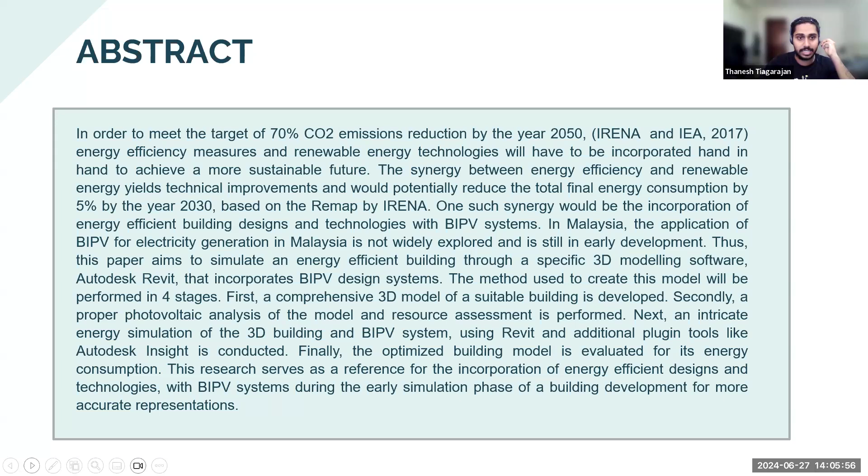Okay, next slide. Before I begin, let me give you a rough overview of the energy scene in the world, and particularly in Southeast Asia.

Based on the world energy transition outlook, almost two-thirds of carbon emissions released in the world are related to energy related emissions, with about at least 36 gigatons of CO2 released by five of the major countries in the world, and this is almost 70% of it.

So, to reduce the CO2 emissions by another further 70% by 2050, certain energy efficient parameters and renewable energy systems would have to be incorporated together to actually achieve a little bit more of a sustainable future. So the synergy between these two systems could potentially decrease the total final energy consumption of the world by 25 exajoules, which is about 5% by the year 2030.

So one of these methods would be the incorporation of energy efficient building designs and technologies with BIPV systems. Now, energy efficient building design is a process of upgrading or constructing building elements that are able to maximize the consumption of energy supplied to them by reducing energy losses. Now, BIPV systems, however, are products and components that are integrated into the building structure.

So, based on the 11th Malaysia Plan, since this research was conducted mainly in Malaysia, the country actually aims to have at least 2080 megawatts of energy inside the renewable energy mix by 2020. Sorry, excuse me. All right. However, the application of BIPV specifically in Malaysia is still very scarce and in its infant stage. So, in a final report submitted to the United Nations Development Program, Malaysia aimed to achieve at least a 330% increase in installed BIPV capacity.

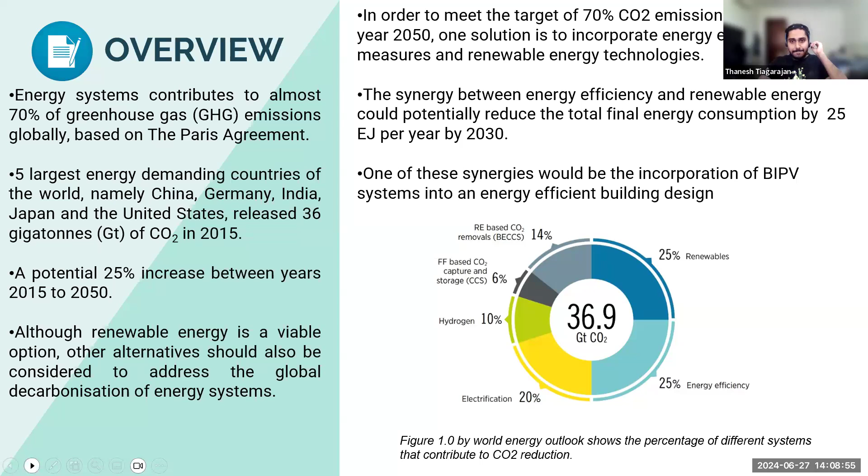So based on the overview and the information stated above, there have been some research gaps that have been identified to help facilitate this transition towards energy efficiency and building integrated photovoltaic development. So when you come towards energy efficiency, there is an abundance of research on design and technology that has been going on for over the last decade. Similarly, there has also been research on BIPV systems and photovoltaics, and it has been steadily gaining traction over the last few years as well.

However, there has been very little, and that has been actually one of our driving motivators here to further this research. There has been very little research on how these two parameters or how these two researches coexist or interoperate with one another to obtain more significant results in terms of how building information modeling should be done. So that was actually, like I mentioned, our main driving initiative.

So the idea was to simulate an energy efficient building design by reducing carbon footprint and enhancing the bridge between energy efficiency and BIPV systems through a unique method of 3D building information modeling. Next slide.

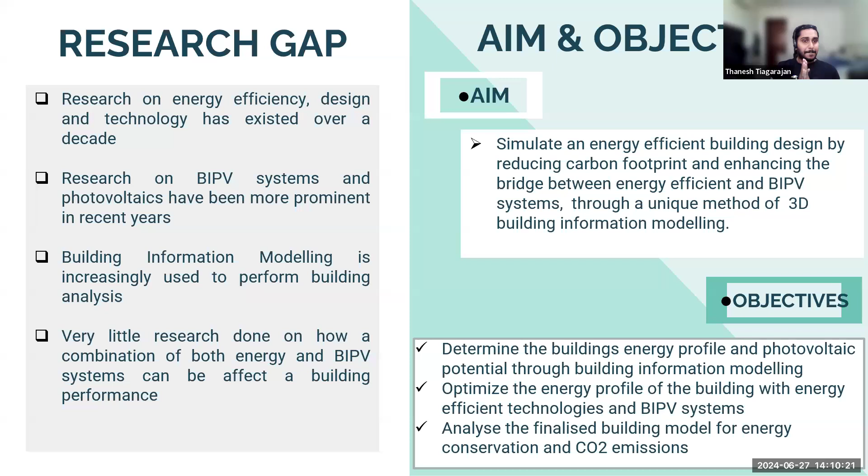Right. So this research mainly integrated the use of Autodesk Revit, Insight, and Green Building Studio. So Autodesk Revit is basically a multidisciplinary building information modeling tool universally used by architects, designers, and engineers to create a holistic 3D building model with real-time information. So it is a design and documentation tool that allows users to create a singular unified building information model complete with conceptualizations and designs. So its compatibility and integration with various other simulation softwares in the market make this an ideal choice for the project.

So when you look into Autodesk Green Building Studio, however, it is a flexible cloud-based tool that exists within Revit, and it is the main simulation engine that powers the analysis function for the photovoltaic analysis. When you look at Autodesk Insight, however, it is also a cloud-based tool that is used to design or enhance the energy design of efficient buildings through advanced simulation engines and analysis of building performance data.

So this particular Insight serves as our main computational tool, as the software generates information regarding the building's projected and current energy use and its subsequent cost to provide you a cost analysis. And it does this through features that focus on energy optimization and performance of the building. Next slide.

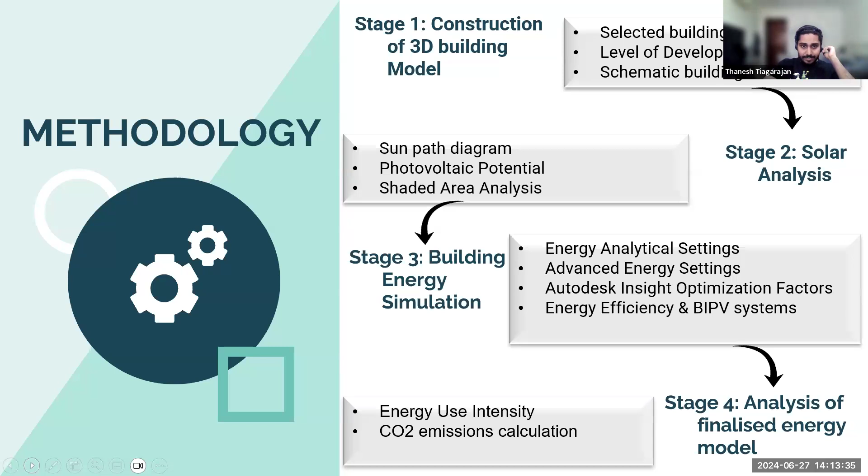Okay. So in stage 1, basically the idea was to develop the model for us to use inside our modeling tool. So in this case, as part of the case study, the building that was chosen for simulation is a building known as Aemulus at the Runway, located at Bayan Lepas in Penang. The main reason for the selection of this building was because its architecture naturally promotes natural lighting and air convection for temperature reduction within the building, such as perforated walls, angled windows, walls, and skylights. So in order to construct this model, floor plans were imported into the 3D modeling software and then constructed manually to scale.

So the next important aspect of consideration is the level of development. Before beginning any building information modeling development, it is important for us to define the intended LOD of the project, short for level of development, based on the available information needed to run the simulations. The term LOD is basically defined as how much detail is included in the elements of the model and the extent of accuracy of the building development with regards to its geometry and attached information.

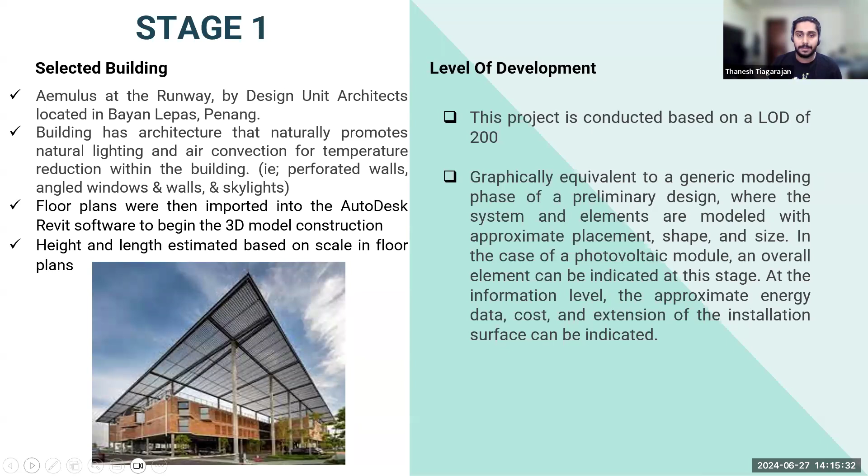All right, so in stage 2 under Autodesk Revit, the sun path is visualized based on geographical building coordinates defined inside the software itself. These sun path diagrams are essential in providing information on the location of the sun and its subsequent impact on the building throughout the year. Besides that, shading analysis is also important to determine the impact of shade by objects surrounding the building or by the existing building elements, such as the facades or the perforated walls, like I mentioned earlier.

So what this highlights is that the facades affected by shade are essential in determining the most optimal location for PV panel placement and its subsequent impact on the total energy value of the building itself. Data on this photovoltaic potential was retrieved from Autodesk Green Building Studio. Yeah. Next slide.

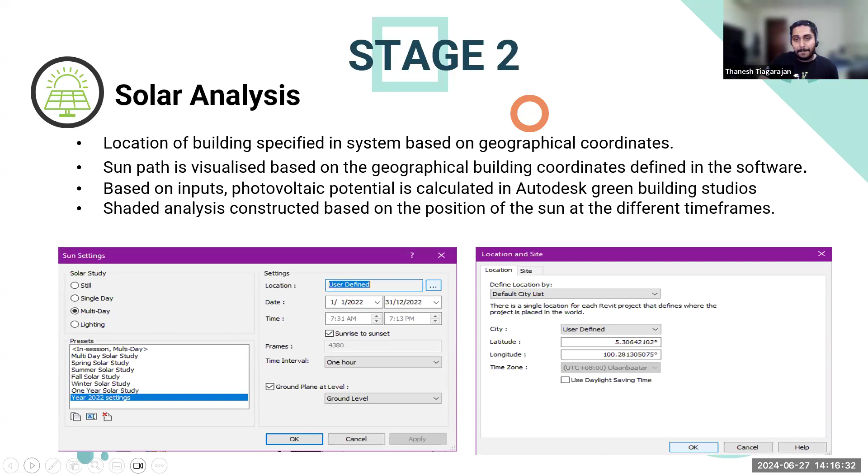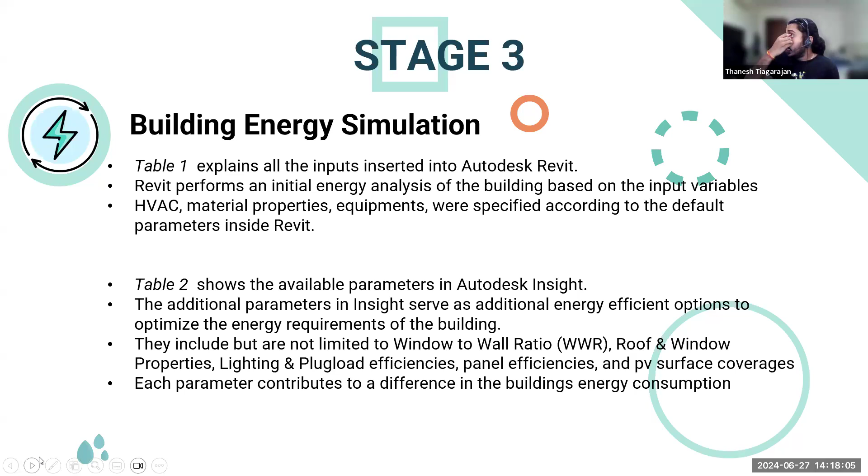Table 2, however, shows the available options inside Autodesk Insight that allow you to use energy efficient options to optimize the requirements of the building. They include but are not limited to the window to wall ratio, roof and window properties, lighting and plug load efficiencies. For the BIPV aspect, we have panel efficiencies, PV surface coverages and payback periods. So if you were to look at the next slide.

So basically this is a slide that describes table 1, showing the input variables that were included to create the constant model for us to perform our optimization values for. Okay, next slide.

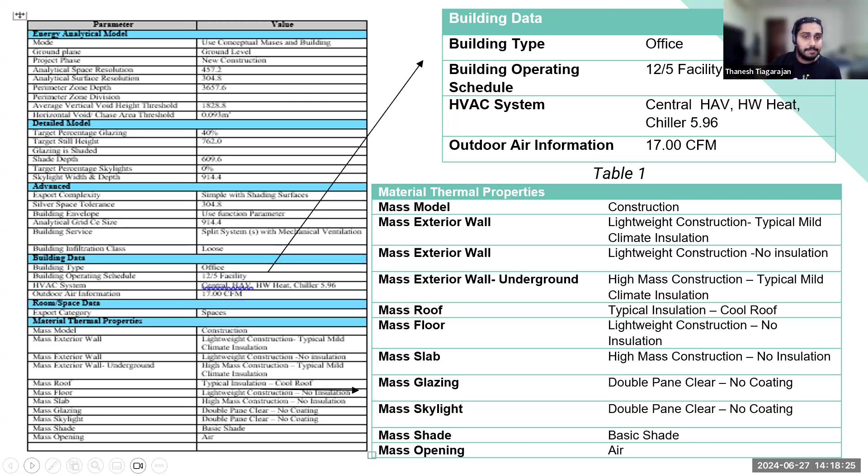This is table 2. These are the options available to utilize the energy efficient parameters inside Autodesk Insight to create different scenarios and cases at which we can identify the best geometry, the best design, or the best parameters for an energy efficient building.

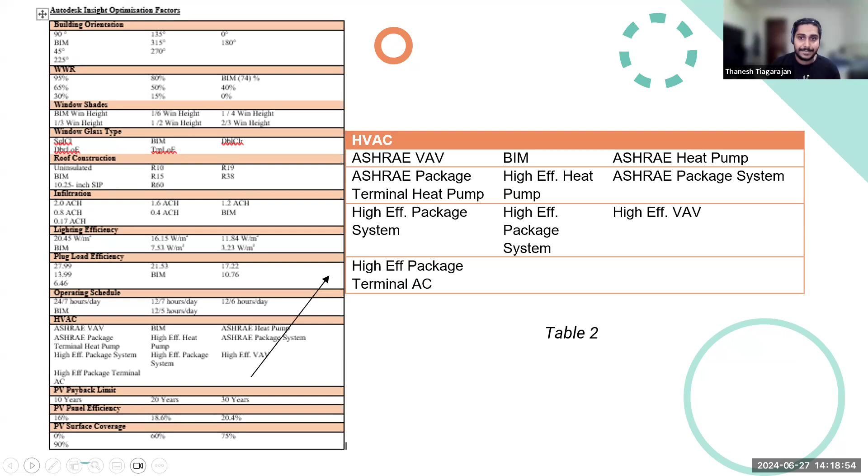Next slide. Each of these parameters contributes to a difference in the building's energy consumption, and this energy consumption is quantified through a specific metric known as energy use intensity. The indicator of the energy efficiency of a building's design and operation is defined as the EUI. Each parameter, as described in stage 3, affects the building's energy consumption and contributes to a change in the EUI based on the amount of energy either consumed or saved.

For example, a hospital or a laboratory will have a higher EUI value than a residence or a small office building because the demand is naturally higher. This is calculated by dividing the total energy consumed by the building in 1 year over the gross floor area of the building. If a system combination consumes more energy after the optimization, the potential difference of the EUI value is displayed as a net positive, meaning that after optimization you require more energy to operate the building on a daily basis.

So if your combination of energy optimization parameters manages to save energy, then that potential EUI difference is described as a net negative value. Autodesk Insight then compiles all these individual positive and negative values to come up with a finalized intended combination and a singular EUI value.

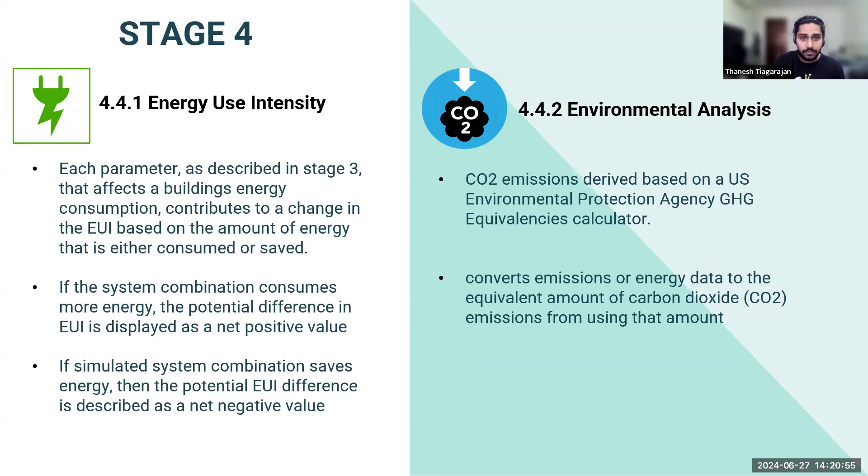On top of that, we also use the US Environmental Protection Agency's GHG equivalencies calculator to identify how much carbon dioxide emission is excreted from each model before and after the optimization has occurred. Next slide.

Okay, so as the result of discussions, in terms of defining the model, the dome highlights the solar positions based on real-time data to simulate the past and future sun locations for solar and daylight analysis. Since Malaysia is located near the equator, the model justifies that there will be substantial and constant sunlight throughout the year.

Based on this, it is proven that the northeast and southeast facades receive the most light in the morning, and the northwest and southwest receive the most light in the evening from about 5 to 7 p.m. Revit also computed the global horizontal irradiation and direct normal irradiation data. Next slide, please.

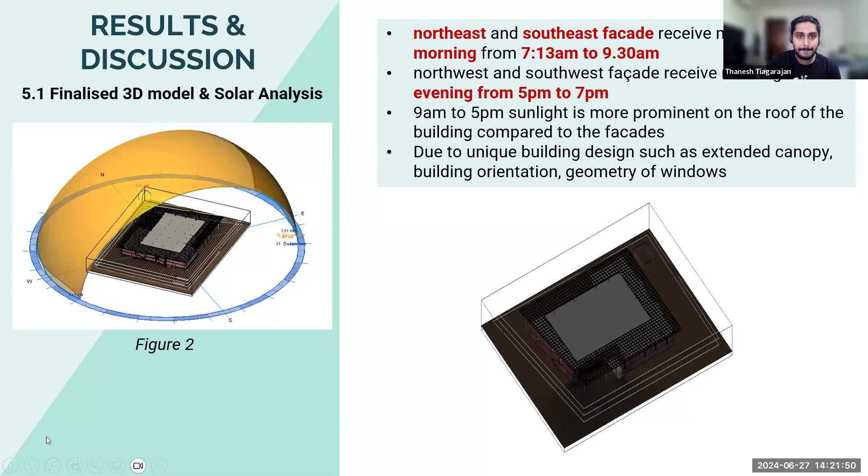Based on this data, the model receives the highest peak irradiation in the month of June 2022 with a total irradiation of 162,000 watt hours per meter square. The peak direct radiation is also at a total of 185,000 watt hours per meter square, which is also in the month of June.

What this data clearly supports is that the sun path diagram is accurate, identifying that June and July receive the highest amount of sunlight in a year. The rotation in the sun's trajectory clearly indicates that from May to August the sunlight received is highest above other months consecutively.

Due to the building's unique design, such as the extended canopy, building orientation, and geometry of windows, sunlight is more prominent on the roof compared to facades. The canopy is constructed in a manner that extends outwards as an overhanging roof from the perimeter of the roof to shield the facades from excessive sunlight. The protruding geometry of the window itself greatly limits the impact of solar radiation on the facades and shields the glazings. Next slide.

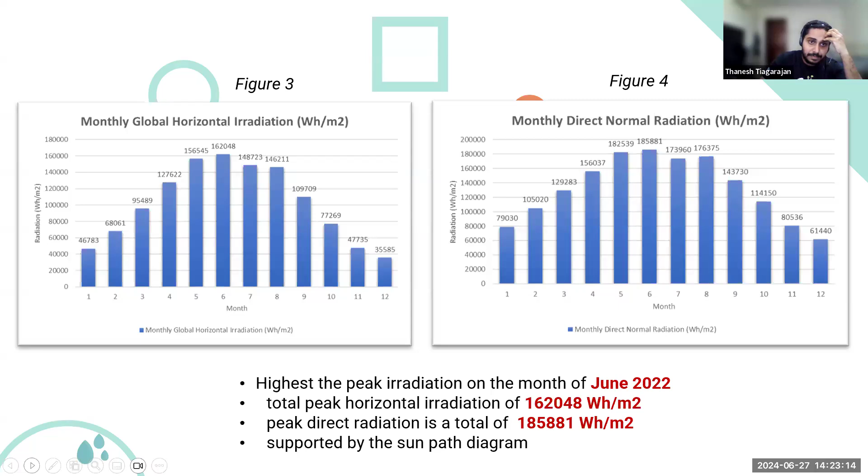Okay, so this is basically the initial energy simulation based on the constant that was created and defined as the parameters from table 1. So based on the input parameters defined in the system settings, Revit was able to compute a wide variety of performance indicators to accurately depict the energy demands and their subsequent contributions towards the energy mix of the subsequent building. So due to the broad purview of the results, the section below highlights the information that is only relative to the scope and extent of this project.

So in this case, it would be interior lighting, interior equipment, and the total energy consumption. So based on the graph, the highest months that require the energy are basically in the months of January, July, October, and December. These values are simulated based on operational hours defined in the system input and based on equipments in the building as estimated by Autodesk Revit. So the increased monthly electrical consumption during these months indicate that the load requirements are basically higher. In July and October, heat and light received are the highest, therefore more energy is required to regulate the cooling system of the building.

Now, when you look at the percentage of energy consumption, it can be seen that electricity is required most for equipment at 57%, and interior equipment at 57%, followed by lighting. So as explained in section 2, this exists because of a default set value and synonymous to the level of detail based on 200. So as you progress to higher level of detail such as 300, 400, and 500, for example, you can use more detailed data to create different variations and different sections to determine how much your building's energy contributes to your entire energy consumption.

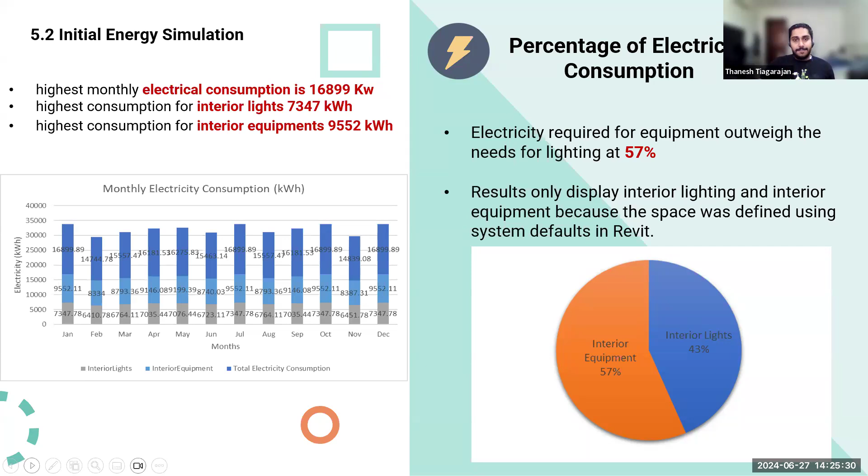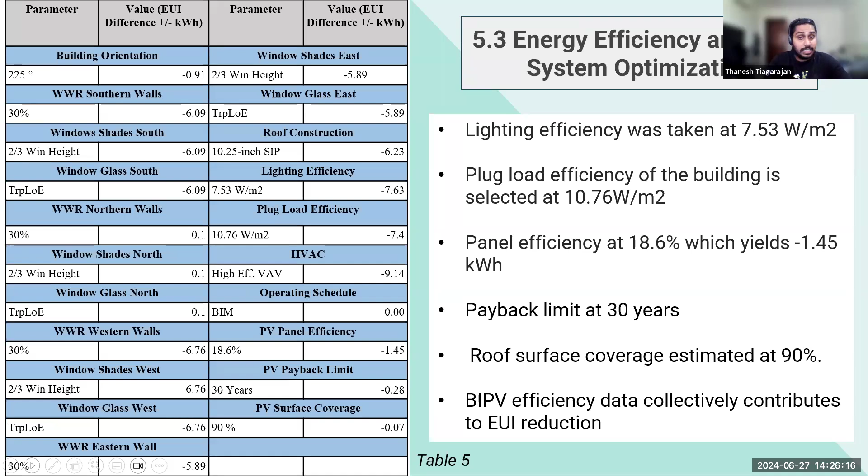Okay, so these combinations that were selected here are based on the constant option like I defined in the model. This means that if you were to look at this graph, the BIM option is essentially information modeled as and how it is from Autodesk Revit. This is based on the building's parameters, the building's geometry, angle of inclination, however the building is actually made currently. So most of these parameters do not affect the pre-optimization EUI values of the building. This is due to the fact that they are basically input variables. Now, the initial energy simulation performed by Revit already utilized these values to simulate the analysis to generate a constant that can be used as a reference. Next slide.

Now, the combinations given here are selected by Insight as the most viable system configuration that is highly interactable with the existing system of the building model. If you were to look at the graph here, the optimization with respect to BIPV, for example, highlights an average surface area about at least 18.6%. Sorry, that is in terms of PV panel efficiency. So when you look at these graphs, this does not identify a trend, or how I would say a progressive state. What this shows is how different optimization factors affect your energy use intensity value for that specific building.

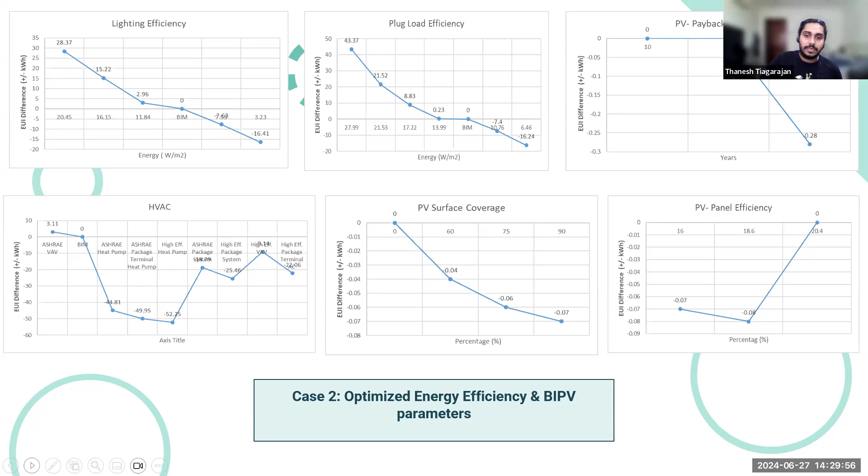Next slide. So based on what was described there, each of these differential EUI values contribute to a much larger EUI metric. So the final EUI value was extracted from the Autodesk Insight interface and shows that the optimization for the initial system with additional energy efficient parameters has managed to reduce the building's final energy consumption from 194 kilowatt hours per meter square per year to 140 kilowatt hours per meter square per year. So this was a reduction of 27.8%.

So to benchmark that result, that the building is actually an energy efficient structure, the final EUI value was compared to two international standard metrics, namely ASHRAE and Architecture 2030. So Architecture 2030 is an independent organization with goals to minimize greenhouse gas emission, reduce energy consumptions, and also improve adaptive building environments. ASHRAE, however, has a benchmark for energy efficient building designs, and it considers the minimum energy efficiency requirements for the construction and designs for a new building, at the same time determining compliance criteria for green building considerations.

Now, based on this roadmap, it is determined that 61 kilowatt hours per meter square per year is determined by Architecture 2030 to be considered as an energy efficient building, while the ASHRAE 90.1 consideration determines 196 kilowatt hours per meter square per year as an energy efficient metric. So the result obtained by this energy analysis shows that this simulation stands somewhere in between these two performance rating systems. It is important to note the purpose of the building and explanation given in the previous sections, highlighting the fact that it was a very early design stage-based simulation.

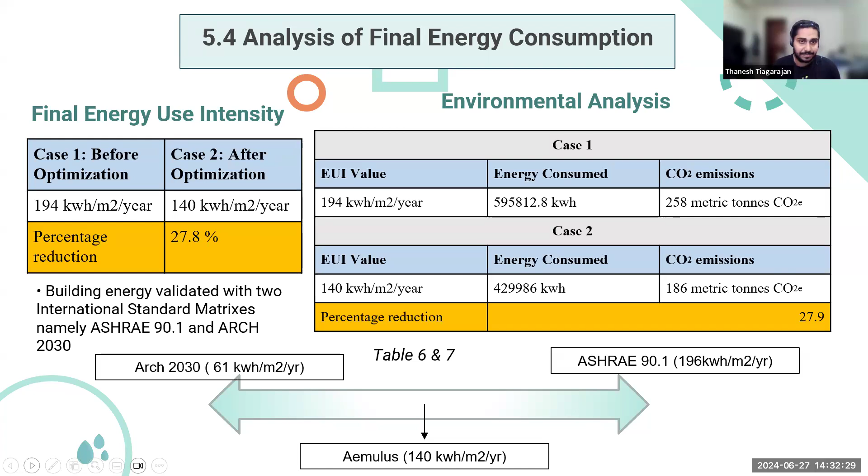So to conclude, building information modeling and tools are actually very useful in performing detailed building analysis. So the geometry and design of the Aemulus structure greatly reduce the building's energy requirement, incorporating merely just default values set by Revit. So when you look into the future and how you could expand this for future users, you could probably see that defining more detailed parameters into your BIPV tools, your building metrics, like I mentioned, lighting, pumps, your HVAC equipment, drainage, heating and cooling. Defining this to a more detailed, exact value gives you more flexibility and more detailed options to utilize in terms of your energy optimization function later on in your cloud-based tool.

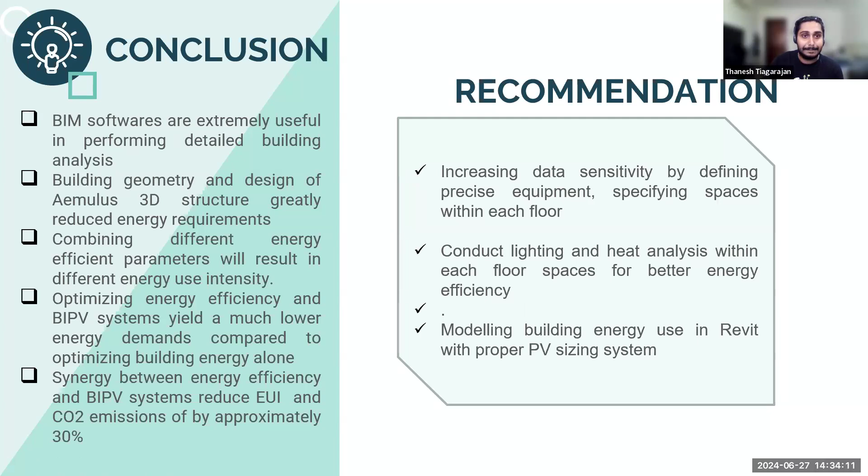So I think that's about it in terms of my presentation. I hope this gives somewhat of an idea of how you can incorporate building information modeling towards energy efficiency and BIPV tools specifically. So when you look into BIPV, there are also energy efficient tools, BIPV tools inside Revit itself, to compute more detailed parameters to highlight better BIPV schematics and performance data. Yeah, but that's about it. Thank you.